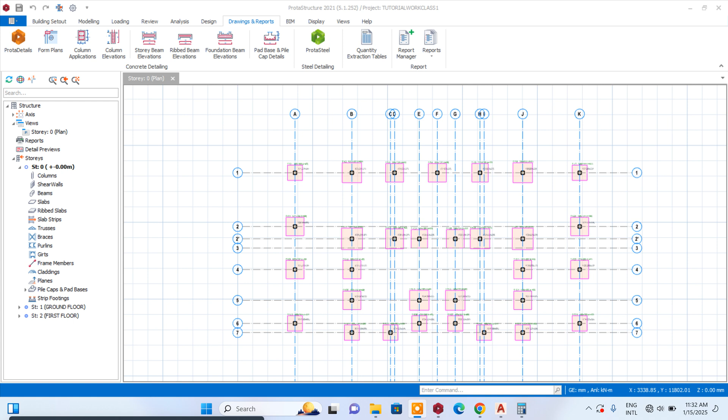Today we are going to continue from where we stopped in our previous video. In our previous video, part 1 and part 2, we did so much on the modeling aspects of our structure, the analysis. We ensured that our structure, which we have designed, is safe and is economical.

So the next thing we are going to do today is generate our details and export to AutoCAD, where we'll begin to carry out our detailing. After you have done your analysis, your design, your foundation, the next thing you'll be doing is to generate your details.

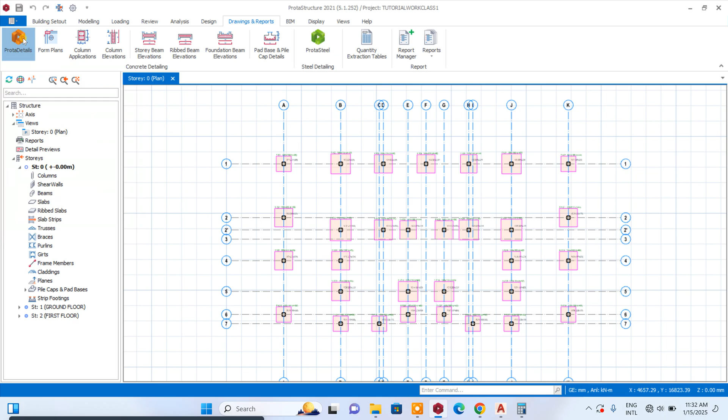So you just click on drawing, click on drawings and reports. Under drawings and reports, you click on Protadetails. So you allow it to load. You can see your Protadetails loading. I'm using the 2021 version of Prota structure.

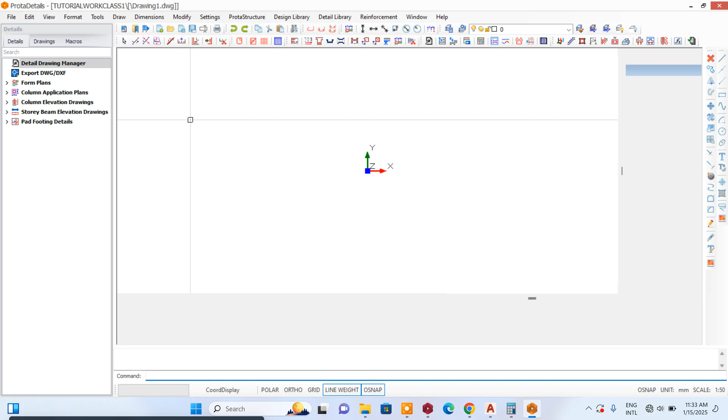Once this has opened, the next thing you do is go to Auto Generate Details. So you click on this one. From your pull-down menu, I'm going to show you some settings here that you actually do to enable you to carry out your detailing so easily.

Now, most of the times when you open your Prota structure details, you discover that under option 3, hatching options, mark topmost columns, it's unchecked. So what you do is check this one, and set this to solid. The reason we check 'mark topmost columns' and set it to solid is for different purposes.

In some designs, some columns will actually start from first floor or ground floor to first floor, and some may start from first floor to second floor or other floors. When you check this, it will enable you to identify those columns. At any given story where you have used or fixed a column, the software will identify that column with a different color, so that when you are carrying out detailing and get to a particular story, you know some columns are actually starting at that story and continuing to the next.

So this is very important. I'm also going to show you another option here. If you fail to carry out your settings in Prota structure during your modeling or analysis, you can come here and choose 'show number of bar in label'. If you don't choose this, sometimes you may not see your slab quantity of reinforcement on your slab. So you have to click this.

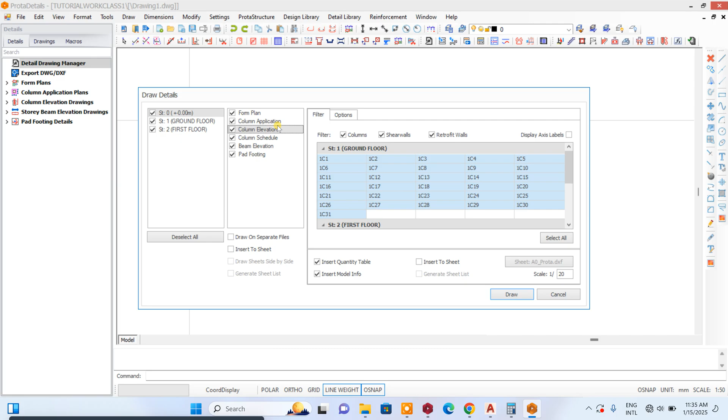So under column, you go to column elevation. Under column elevation, you go to options. In most cases you see this unchecked, but there is a way of setting my Prota details such that anytime I generate details, most of these options are automatically checked. In case you fail to do this, I'm going to check this and check this.

Now what this option means is that if you have your columns, most of the times Prota structure generates columns for each story differently. Ground floor columns will be different, not joined together, and first floor will be different, second floor columns will be split in different ways.

But what this option helps you to do is that it merges the columns. For those columns starting at the ground floor to first floor to second floor, they will all be joined together. So we'll click this and I will show you how Prota Structure will generate details. So click on draw.

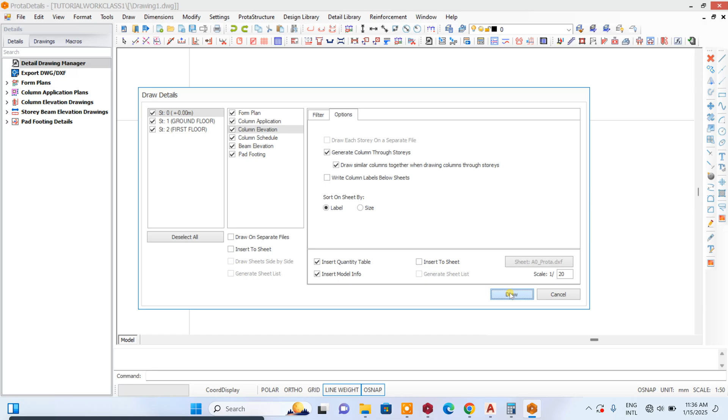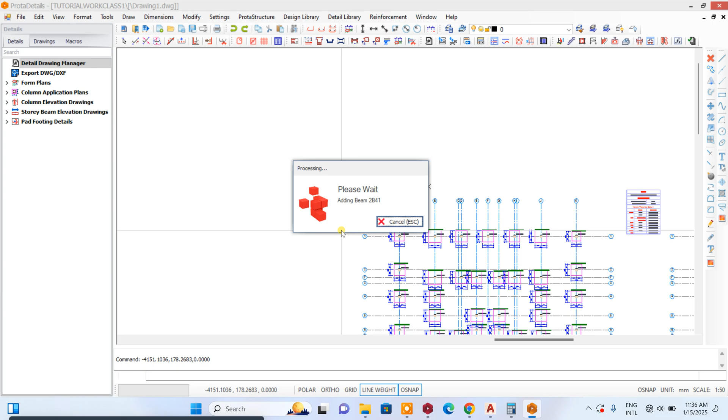So the next thing I do is to click in the environment. So you allow your details to generate here. Remember, this can only be done after you have successfully carried out your analysis and you have ensured that all your members have passed. So you can see that our columns are now joined together. This is your ground floor and this is your first floor,

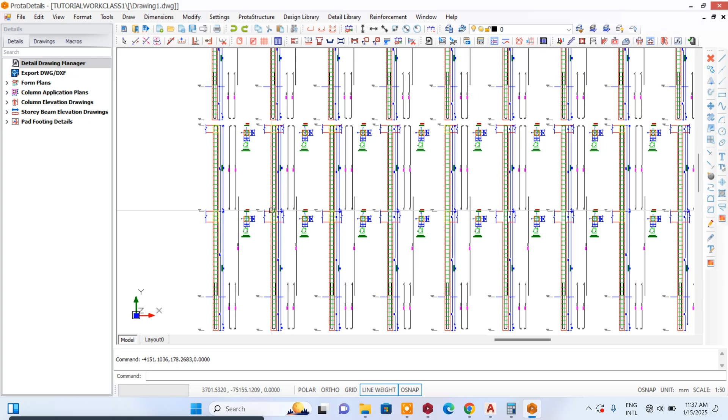so they are joined. But in a situation where you fail to check that here, you discover that this ground floor, from this beam down here, will be separate. It will not be joined up here. This one will be separate, this one will be separate. So this will help you, especially for those who like using this for their detailing. If you like using this, I think this option will be helpful for you.

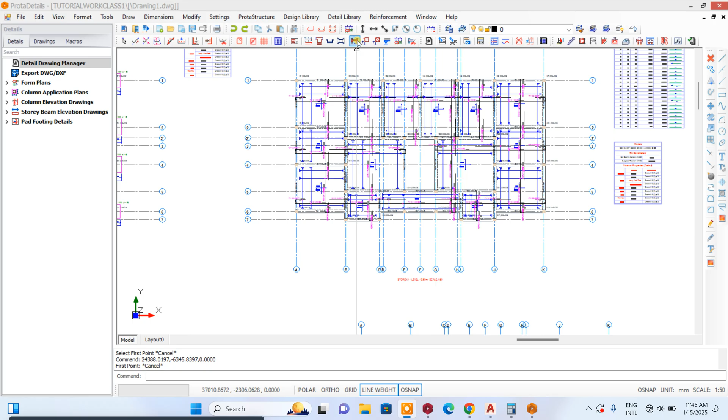So the next thing we'll do is to cut our slab section. For you to take your slab section, you click on plan elevation, click on this one, then you go to auto mode. Then in auto mode, you click anywhere. Okay, let me click on it. Yes, so you click on auto mode. Give it some time. So this is your section.

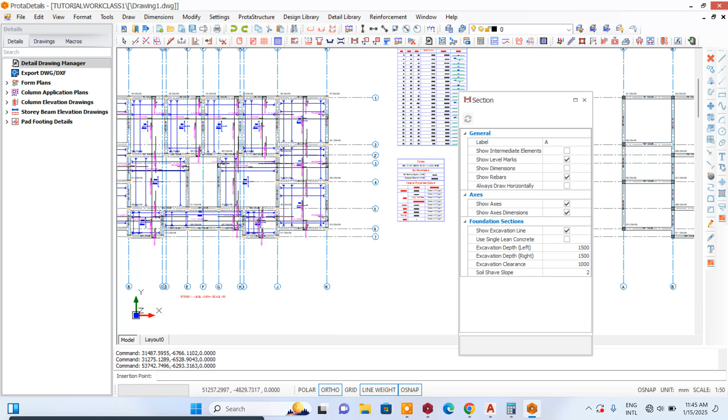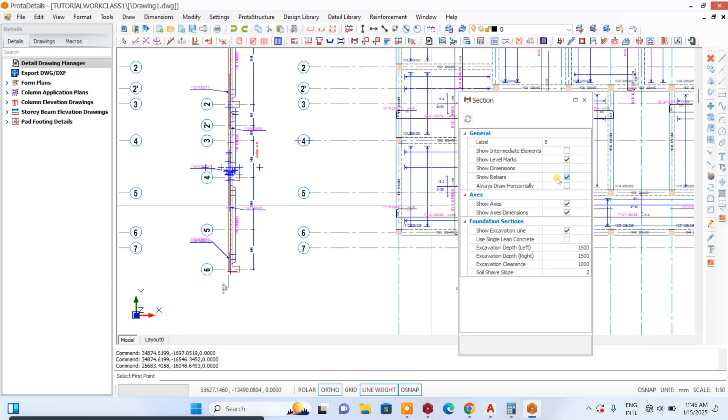So you can actually take sections at different places. Let me take it. Sections are usually taken at places where you have complex slab, to give details of what you want to do. So these are the sections I want to take. You can click so many options: show dimensions, show level mark. You can decide to show rebars or whatever you want to do. So the next thing I do is to cancel this.

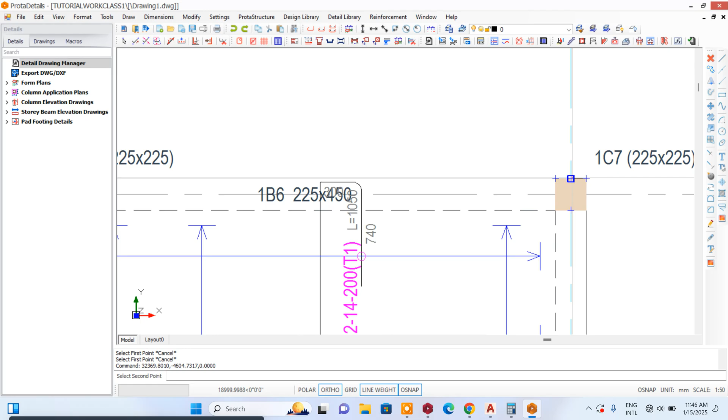So we'll go to detail library. If you want to create your dimensions, you can just click on automatic dimension. So I'll just click it here, where I want it to stop. So I'll just keep it here. So let's see my dimensions. You can actually do all of this so that when you go to your AutoCAD, you don't have much work to do.

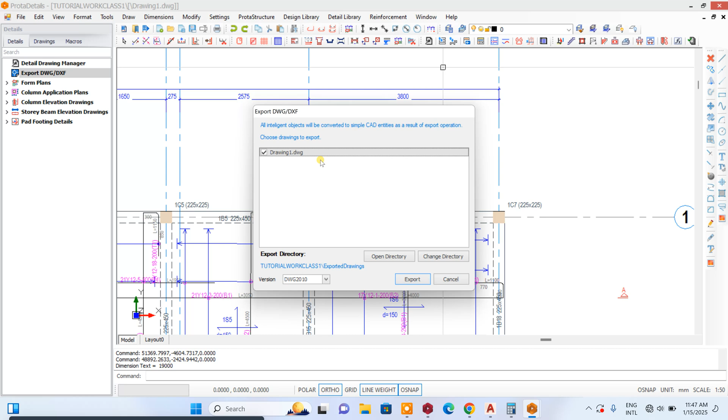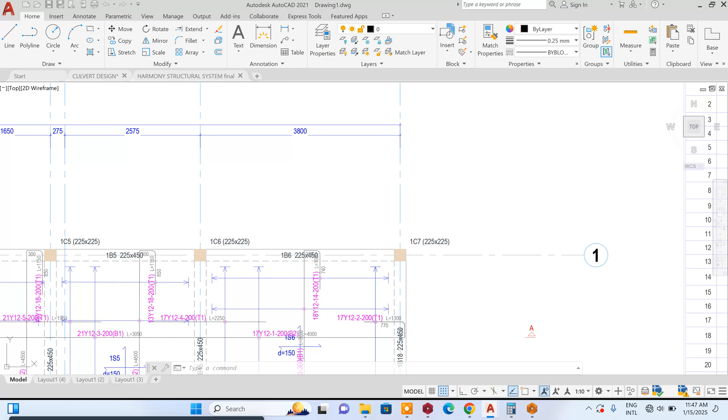So the next thing I will do is to click on export DWG/DXF file. I click on it. If you want to change directory, you can change where you want to save it. It all depends on you. So I will export. You can see it processing over here. Allow it to process. Once it's processed, you see it here. So I can now open it in my AutoCAD. So this is what I have.

So this is how to carry out your settings in Prota Structure details and how to export them to AutoCAD. In our next video, we'll be learning how to carry out detailing. We'll start with the detailing of our slab, then go to detailing of our columns, detailing of our beams, and detailing of our footings.